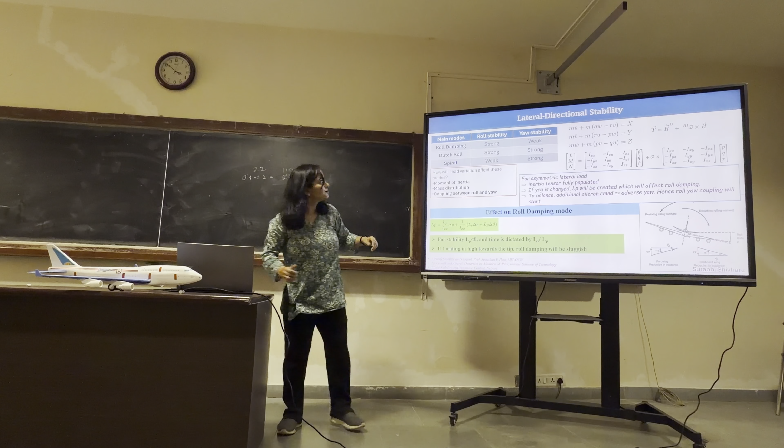We are concerned primarily with longitudinal dynamic stability. It is the stability along the pitch axis, that is the y-axis, moment along the y-axis. This is mostly influenced by the CG of the aircraft, which is equivalent to the center of mass. The parameter that we're considering is the pitch angle represented by theta. It has two different parameters: the transient state and the steady state response.

The transient state response is the behavior seen while the system is moving between two different equilibrium states, and the steady state response is the final state or the new equilibrium state the system achieves here. That is the aircraft here.

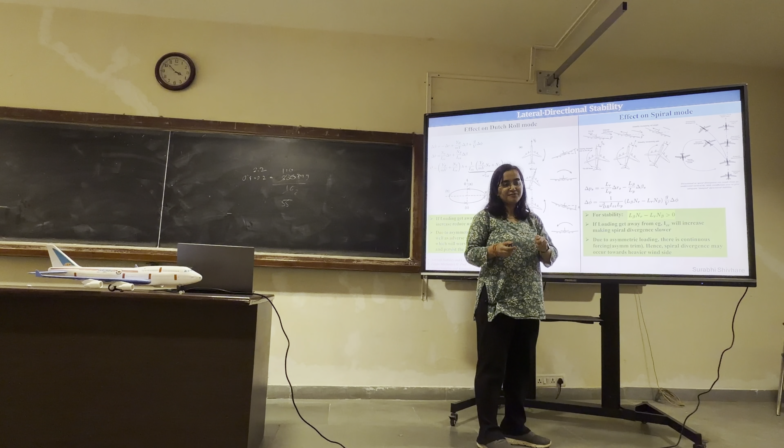The important point on the aircraft that is of concern here is the neutral point. It is a location where pitching moment is independent of angle of attack for the whole aircraft. Hence, we can say that the dynamic stability or the dynamic response here depends on the position of the CG relative to the neutral point.

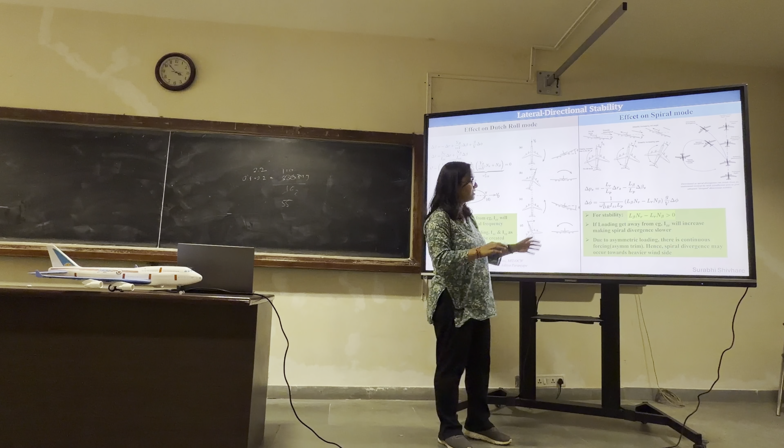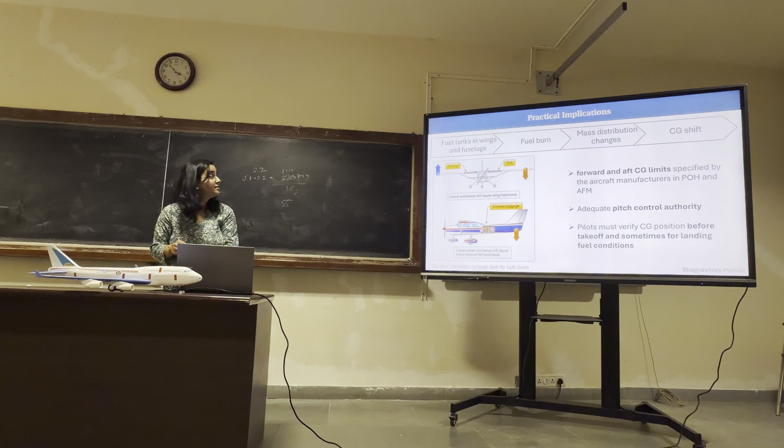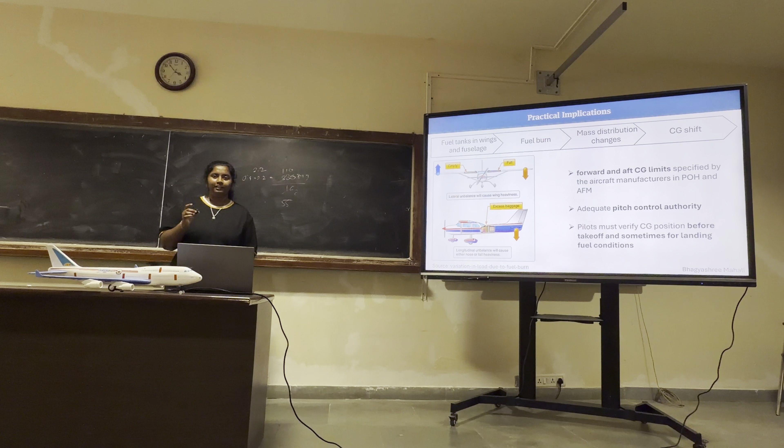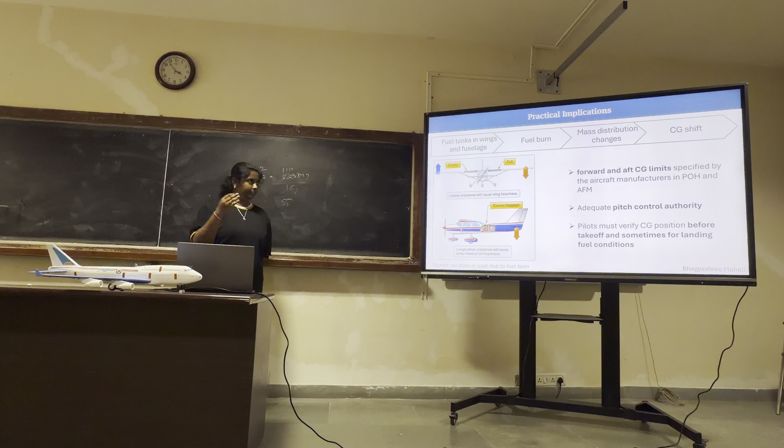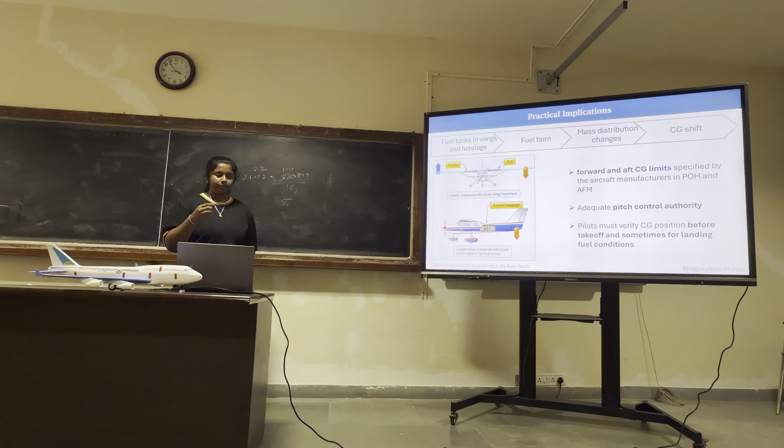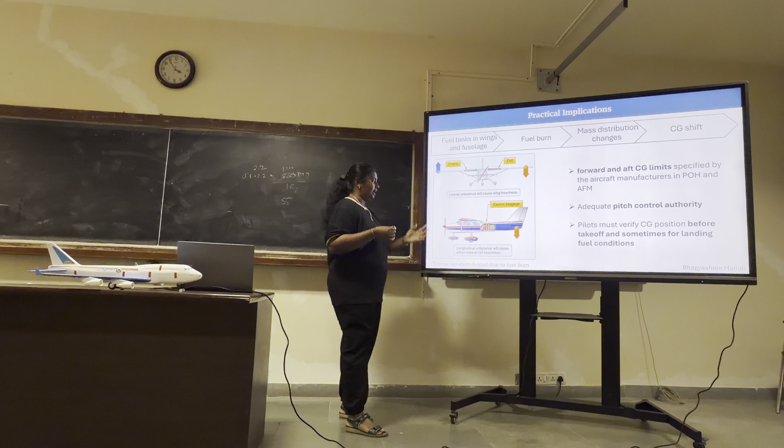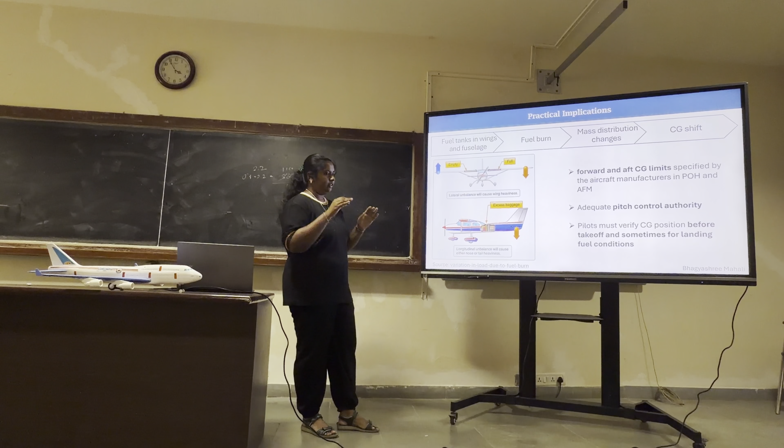Now let's look into the effect of forward CG on the overall stability. Concluding from previous presentations, we have seen for static stability, moving the center of gravity forward will increase the distance between the CG and the neutral point, hence increasing the static margin. And this will increase the longitudinal static stability. So when a wind gust hits an aircraft, the aircraft's tendency to return to its original equilibrium position will be much higher, making the aircraft more sluggish as CG shifts forward.

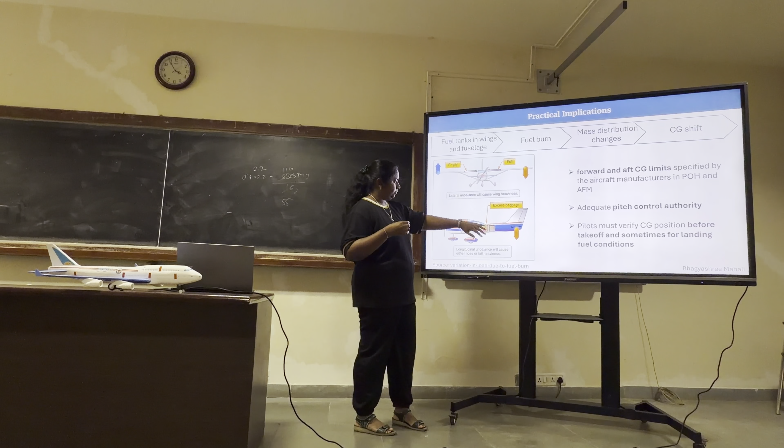Now, considering the case of dynamic stability with forward CG, we'll consider the short period mode, which mostly involves angle of attack and pitch rate and not much velocity or altitude. As discussed in the previous slide, forward CG will increase the restoring pitching moment, that is, increase the pitch stiffness. As a result, the natural frequency will increase and the damping ratio will also increase, and this will cause the oscillations to decay faster. So that is the case of short period mode.

And in the case of phugoid mode or long period oscillations, it mainly involves the exchange between kinetic energy and potential energy, that is between velocity and altitude. So here, when the CG shifts forward, it will lead to damping of amplitude, and hence the forward CG will slightly increase the damping. So the effect of forward CG actually helps both modes become more stable. So that is all for dynamic stability.

Now coming to the effects of aft CG on dynamic stability. First, coming to longitudinal dynamic stability. In phugoid mode, since Karthik explained that for dynamic stability, the aircraft has to be statically stable. But as CG moves rearward, the static margin decreases. That is, the distance between CG and neutral point decreases.